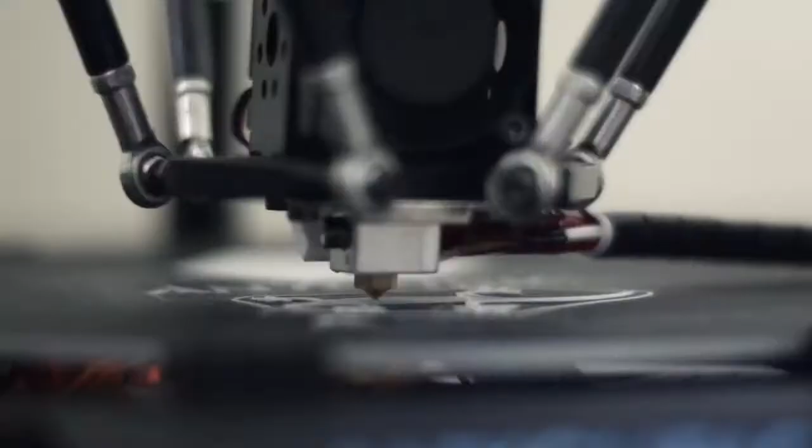I'm Jana Lynn Peppel, and today on Create 3D Models, we're going to learn how to design jewelry using Tinkercad for a 3D printer. 3D modeling and 3D printing have revolutionized how jewelry is made and designed. Not only can you directly print jewelry like this ring and this pin and necklace, but you can make custom jewelry in gold, silver, and other precious metals. And 3D printers can make molds for casting jewelry.

We're on our way to visit my good friend Sage Chandler. She's the manager of By George Jewelers. She's going to show us how all this works.

Good morning, Sage. Good morning, Jana Lynn. So nice to see you. You too. Come on in. You're my first customer.

Thank you so much for inviting me in and showing me all of your beautiful jewelry. So, are any of these pieces 3D printed? No, these two pieces are made by hand, and this piece was made with a mold.

So, why would someone use a mold? A mold is an easy and fast way to make multiple pieces of the same design.

Do you think that it would be important if someone were just starting to learn jewelry making if they learned 3D design? Definitely. Anyone who wants to make jewelry should know how to use all techniques.

Excellent. Well, thank you so much for showing us all your beautiful jewelry and inviting us in. I really have enjoyed it.

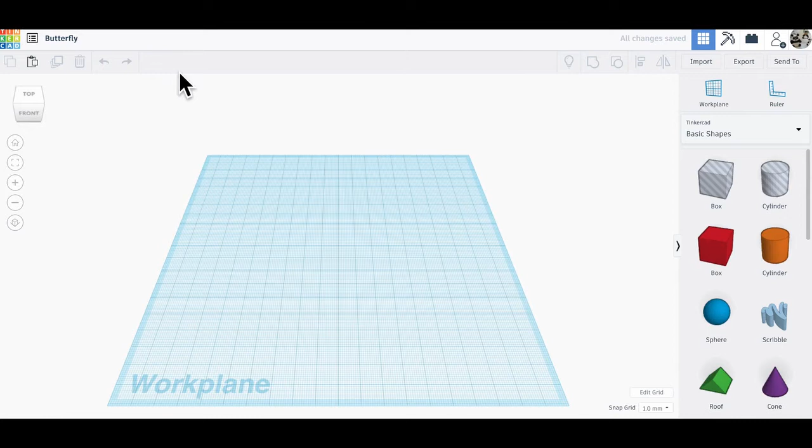Our first step is to create a new design. Name your design. Edit the grid to the default millimeters.

It's helpful if you can get comfortable with your mouse or trackpad. To spin, right-click your mouse. To enlarge or reduce, use the middle wheel of the mouse. To shift the work plane, press down on the middle wheel of the mouse.

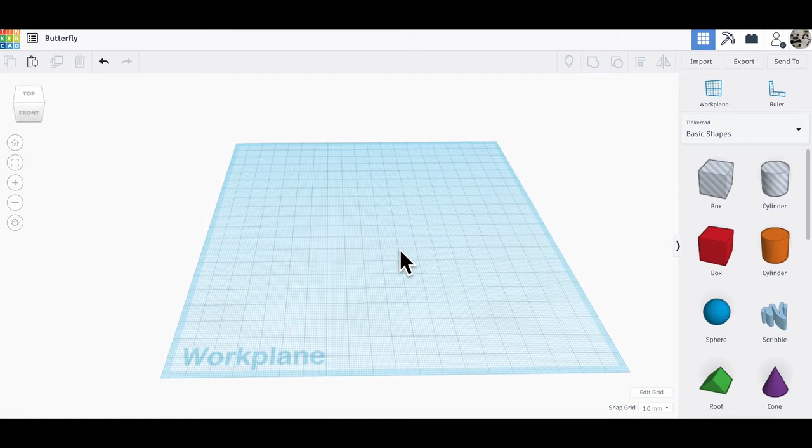To begin, we'll build the body of our butterfly pendant. Select the half sphere. Change the dimensions to 50 millimeters for the length, 12 millimeters for the width, and 10 millimeters for the height.

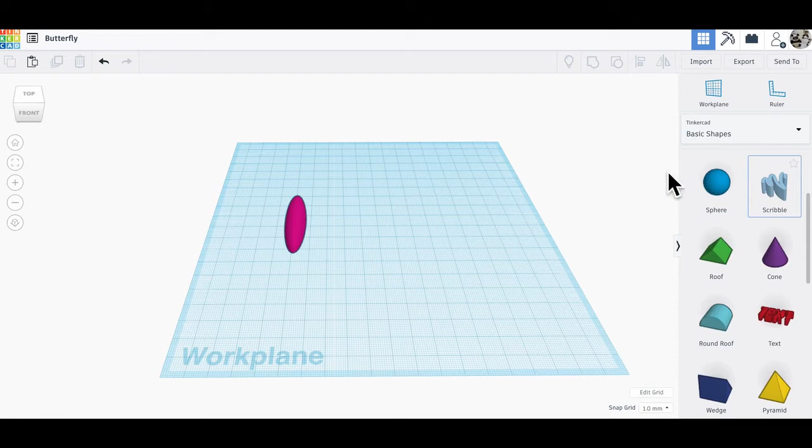Select the Scribble tool to design the two antennae. This takes you to the Scribble pad. Pick a point, then press and move your mouse up and to the right to swirl inward. Click Done at the bottom of the screen.

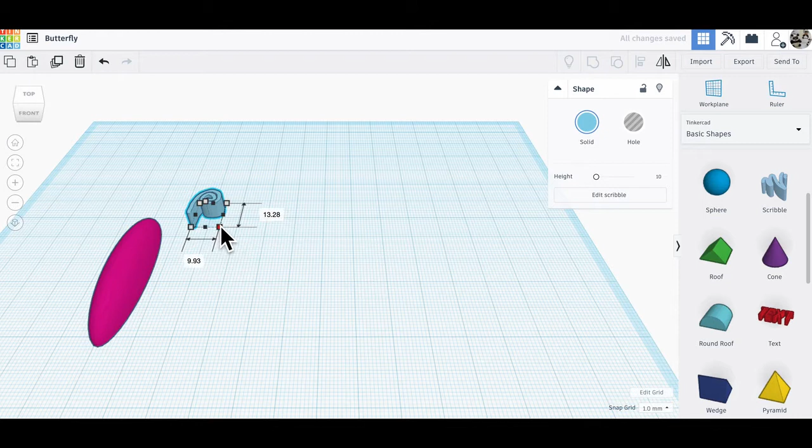Scale the antenna to the size you want and make the height a minimum of 3 millimeters. Move it to the top of the body.

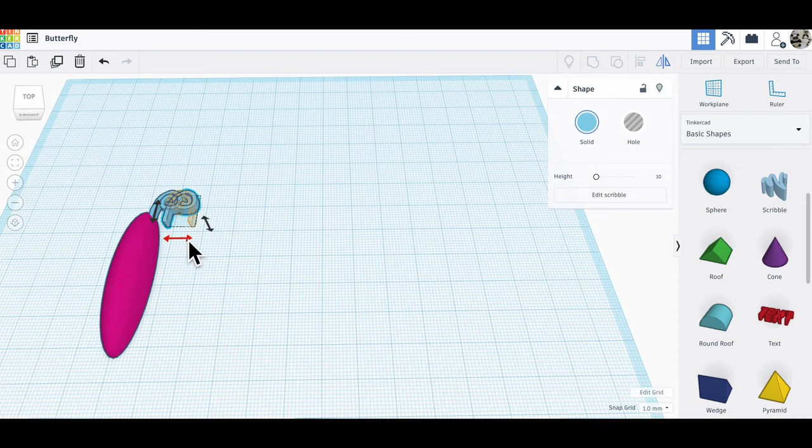Copy and paste. Use the mirror tool to flip the duplicate horizontally. Use your arrow keys to move it to the opposite side of the body. Group the two.

Select everything by dragging a box around all three pieces. Now use the Align tool to center everything.

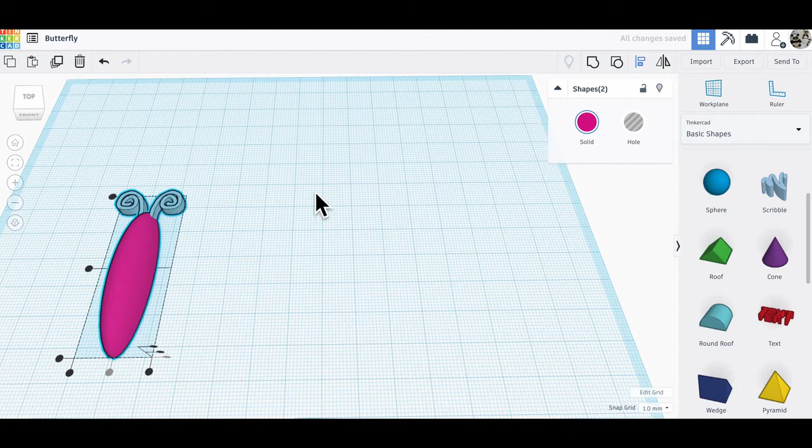Choose the gray cylinder located in the top right under Basic Shapes. Make the diameter 3 millimeters. This is what you use for making the eyes and to make a hole for your necklace. Use the curved arrow on the top to rotate 90 degrees.

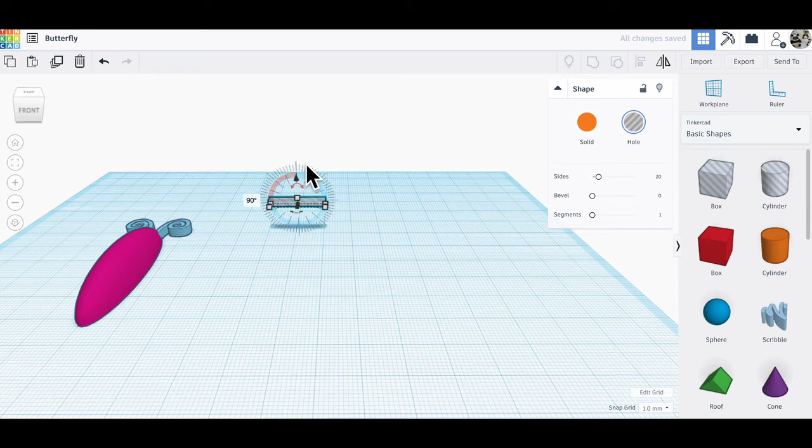Move the hole above the body near the antenna and lower it so it's 2 millimeters above the work plane. Rotate the work plane to make sure it's in the correct position. Select everything and group.

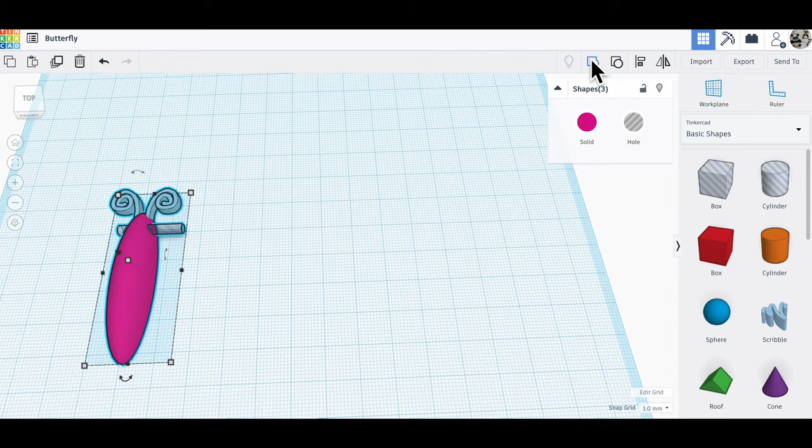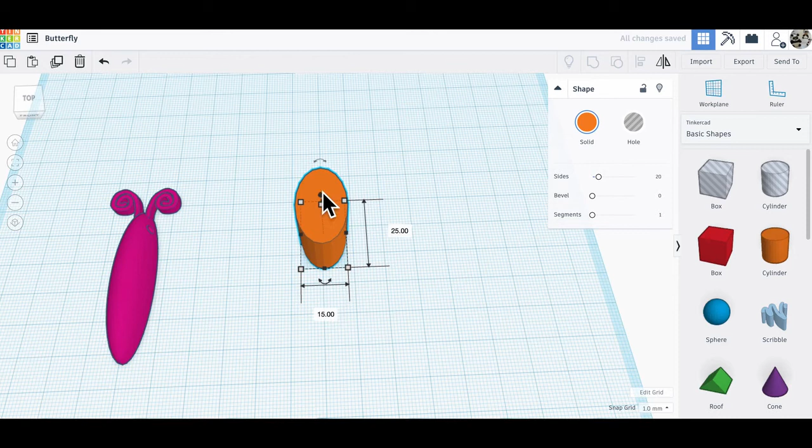To design the wings, we need to create an area where you can add glue and glitter. We start with the orange cylinder located in basic shapes. Drag the cylinder to the work plane and change the dimensions to create an oval: 25 millimeters for the length, 15 millimeters for the width, 6.25 millimeters for the height.

Then rotate the cylinder using the curved arrow. Rotate freehand or type 33 degrees. Now make a copy and paste. Select the mirror tool. Click the arrow to flip the oval horizontally.

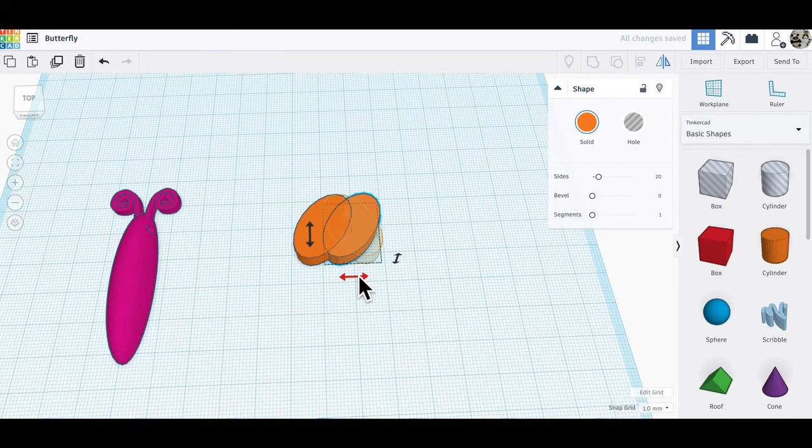Move the second oval down to create the first half of the wings. Select both ovals and group. Copy and paste the combined shape.

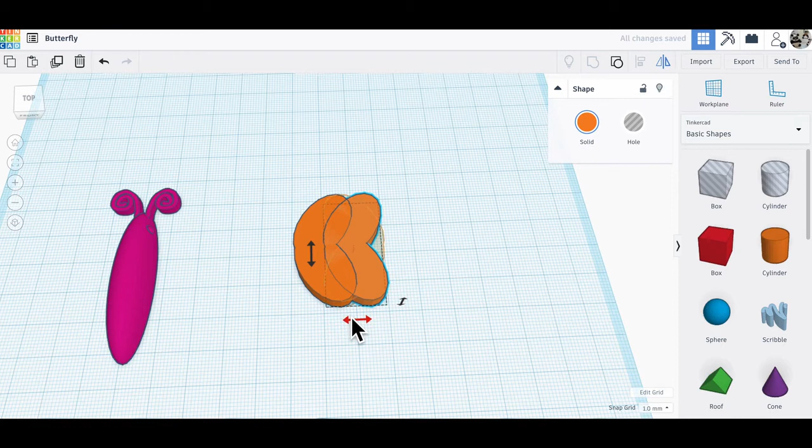Mirror vertically and move to complete the set. Select all the ovals and group. Copy and paste the wings to create a hole.

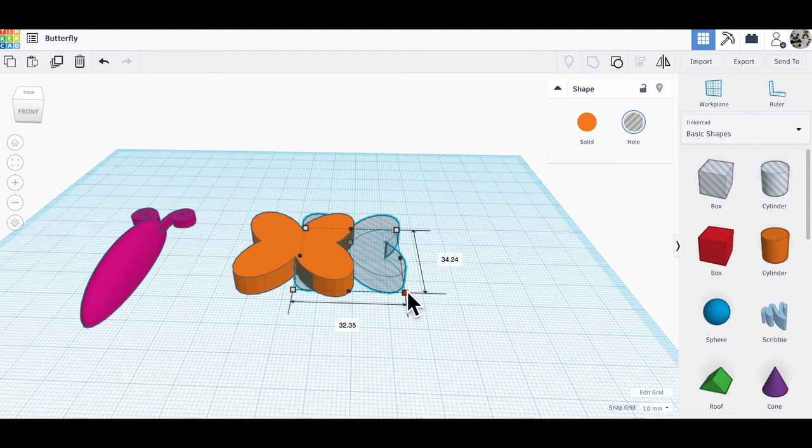Now uniformly make the hole slightly smaller by pressing your Shift key on the keyboard and dragging inward from a corner. Raise off of the bed 2 millimeters using the black arrow above the model.

Select both pieces. Use the Align tool and center in both directions. Select again and group.

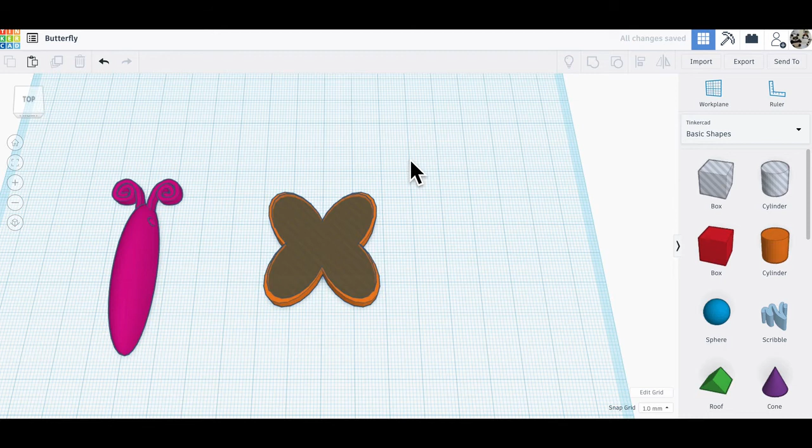Slide the wings onto the body below the eyes. Select everything and align to the center.

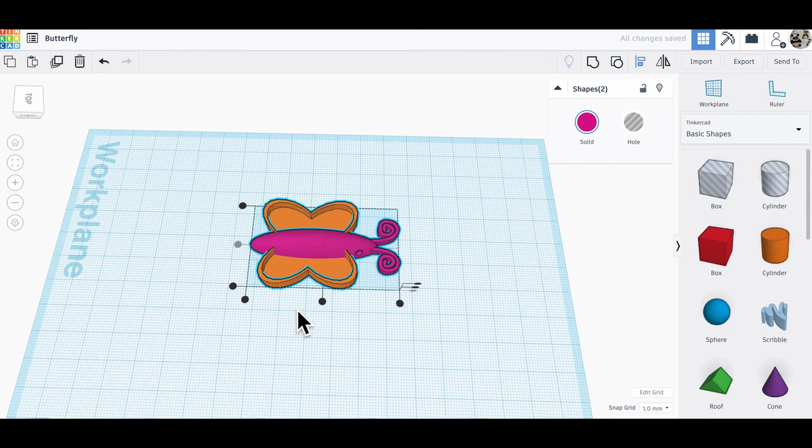From here, you can continue to customize your design by changing the size and adding other elements. Congratulations! You've learned the basics of Tinkercad. Now you can make anything.

It was great learning about 3D design and jewelry making with Sage. We've come a long way from 75,000 years ago of making jewelry out of seashells, but I still love collecting them. They still inspire me to make beautiful things. So I really enjoy you spending your time with me. Thank you.